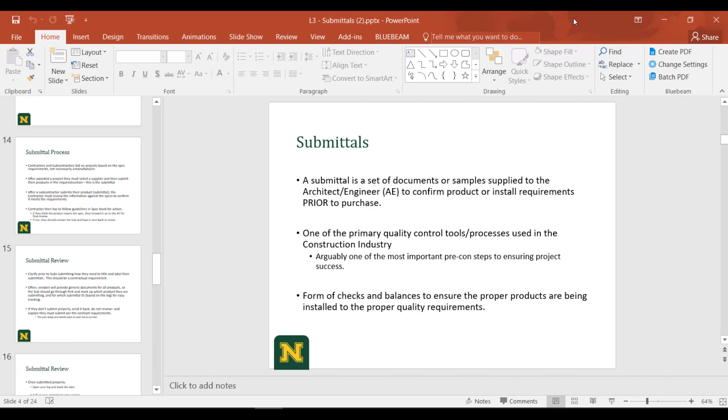Because what we're going to be doing here for this assignment, I'm going to give you 6 different submittals that you're going to have to review, and you have to track them against a log that I've given you. So again, if you have any questions on this, please let me know, because submittals sometimes can be really tricky to understand, but other times if you've done them and you understand the purpose and concept, they might go kind of quick. Just another resource here for you to understand the importance of submittals and how to do submittals.

But what we're going to get into is assignment A2, and here are all your assignment project documents. Like I mentioned, you have 6 different submittals to go through. So we have storm drainage piping, drinking fountains, hydronic piping, cabinet unit heaters, conductors and cables, and then wiring devices. So a couple plumbing, a couple mechanical, and a couple electrical for you to go through. You also have the submittal log and the assignment instructions, and then a guide for how to fill in the submittal form. So the A2 assignment looks like this. I'll just walk it through really quickly so I can give you an example.

Just again, a lot of what we do in this program is guided by our advisory committee, which is made up of 25 people from around the country, and they want to see more submittal review. And it's a good practice because it's how we actually really learn. At least for me, this is how I learned a lot about MEP systems in general, is just managing the submittal process.

So early on, I was pretty fortunate. I got to work on one of the world's biggest children's hospitals, and I was in the MEP division, and I had to manage the entire submittal process and the Navisworks process too. So it was kind of like getting to see full circle how important all the products are, how the submittal process works, the importance of the submittal process, and just understanding how to track all the products that are coming in. So let's see.

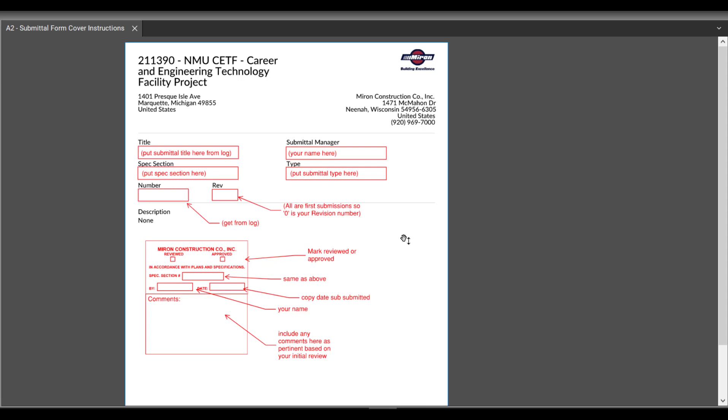So again, I just want to mention that this is a real project with a real contractor, the building that our program is housed in. So none of this stuff is to be shared anywhere. It's just for educational purposes only. And I do have my own markups, so they're not the actual final documents. They're just, again, educational purposes.

So what you're going to get for all of your submittals to review is this submittal form that you're going to have to fill in. So you're going to fill in the title, you're going to fill in your name here, what spec section we're dealing with, what type of submittal we're dealing with, right? So this is going to be like product data, shop drawing, stuff like that. What submittal number we have, so this is going to come from the log, and then what revision we have.

So if it's the very first submittal from that type, it's always 0 is the revision number because we haven't had any revisions. The other thing you're going to have to do is, because the way this spec is written, your job as the contractor is only to review or approve. Quite honestly, you're pretty much just going to review them. You're not going to approve anything because it's out of your wheelhouse. You're not the engineer of record.

You're going to put the same spec section as above because this is our submittal stamp. That's going to be you again here and who is signing this, and then what date. So what you're going to do here is copy the date that was submitted. And then down here, any comments that you might make. A lot of times, especially for like MEPs or structural drawings are another example too, where you're dealing with shops, you're mostly just reviewing them and sending them along.

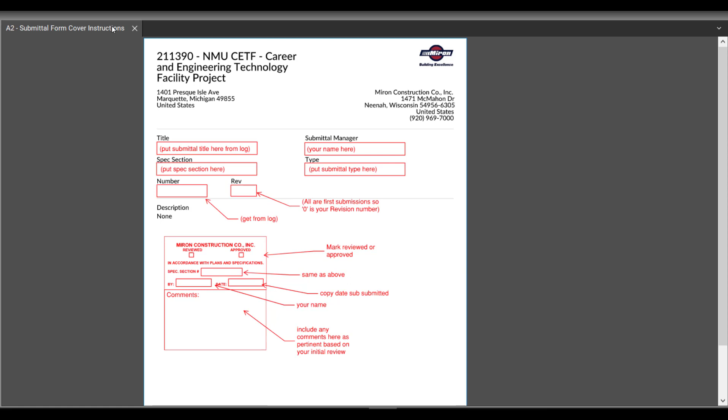And any comments or any things that you see that may not exactly meet the spec requirements, I'd highly recommend just putting a note that says like AE to confirm. So using the cloud function on Bluebeam, if you have Bluebeam to use, or something similar with a note that can just say AE to confirm, along with whatever other note and why it's not specifically meeting the specs as you have found. So that's just a quick little cover sheet to sort of help you along, a little guide so you understand what to do on that first sheet.

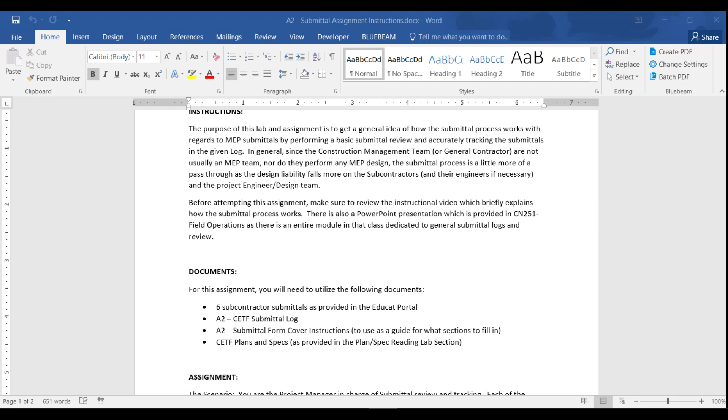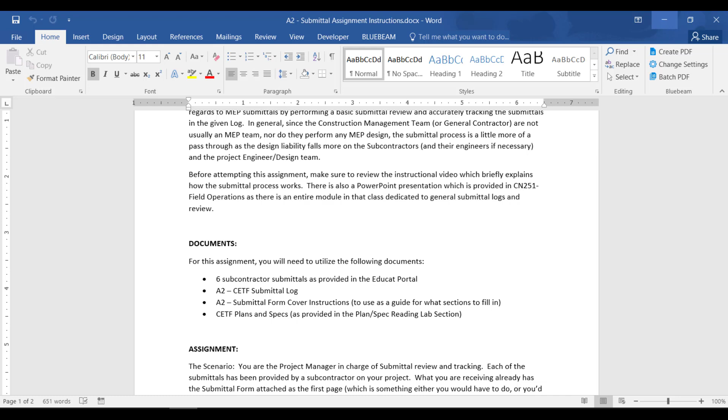The other thing you have to pull up is the CETF plans and specs, because you're going to have to look through specification sections for sure whenever you're dealing with mechanical submittals. And then you're also, in a lot of situations, going to have to pull up schedules. So if it's like a mechanical, like a cabinet unit heater, for example, you'll probably have to look at what the requirements are in the mechanical schedules. So make sure to pull those up and use those as well.

So here's the scenario. You are the project manager in charge of submittal review and tracking. Each of the submittals has been provided by a subcontractor on your project. What you are receiving already has a submittal form attached to it, right? So in general, a subcontractor would be submitting to you. Your submittal form would not be on it, but what I'm giving you is that submittal form that I just walked you through. So you already have the submittal form attached, which is the first page.

And step 1 is, when you take a look at that submittal, you're first going to have to track it in with the submittal log. So you're going to use the submittal log that I provided as well. It looks something like this. Okay, I've only given you the sections that are 20 through 28, just to keep it with the MEPs. So your job is going to be to fill out the section for just the 6 that I've provided for you for the submittals.

Okay, so you're using the log provided to plug in the submittals you received in the right categories. You must fill in only the information for these categories. So there's description, revision, responsible contractor, which is the subcontracting company that sent you the submittal, who it's received from, so it's whatever the person's name is, the date that is submitted, which is, we're using the date that's provided in the submittal form, and then the date submitted to the design team.

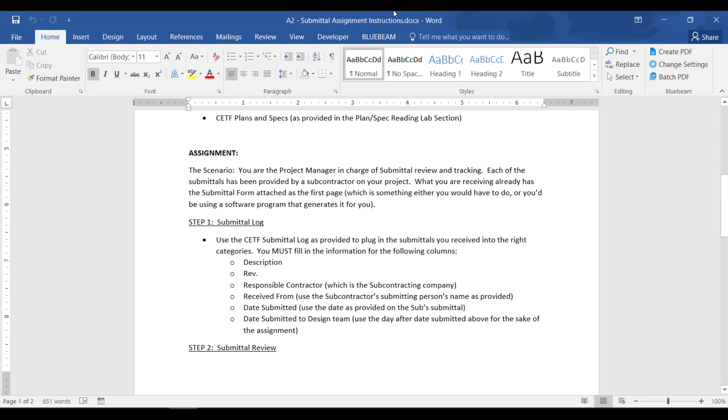So for this one, we're going to use the day after it was submitted to you. So in general, this will be the day that you get the submittal from a subcontractor. You're going to review it. Maybe it's the same day, maybe it's the next day, maybe it's a week. You generally have whatever your specs say, but maybe it's up to a week or so for you to review submittals before you send them on to the design team. So those ones again would be way over to the right here.

So I already have this stuff in for you. I have the title and I have the type, because I want you to make sure that at the beginning of a project, you would be submitting all this stuff and approving all this stuff to the architect, working through it to make sure these are all the products that they want. But what we would have to do then, once we get the submittals, we have to go through the description. I'll show you where that is in the specs.

What revision, responsible contractor, received from, right? The date received, the due date, don't have to worry about. That's just generally something that we would have to put in there. But then the date submitted to the design team, which for you guys is going to be the date after. I already have different dates and stuff plugged in based on the specs, so you don't have to worry about that either. So just follow the instructions on that one.

Okay, so the second step then, after you've gone through the submittal log with all 6 of those items, you want to take a look through the submittal review. So definitely need to use specs and plans for this, primarily the specs, but plans as necessary. You may have notes to take on there, but you may have nothing as well because there might not be any markups. You might be able to see it right away and be like, that generally looks like the right product. And you would pass it along because, again, you're not the engineer.

So don't look at this as being this really long thing. I would just want you to make sure you understand where to look for information and try to come up with some notes to clarify to make sure we have the right products in place. Okay, talked about the submittal cover form instructions. For any markups that you do, make sure you mark them up in red. So on your submittal form, when you get that, make sure that all your writing is in red. If you're marking up things throughout the submittal, make sure those are in red, right?

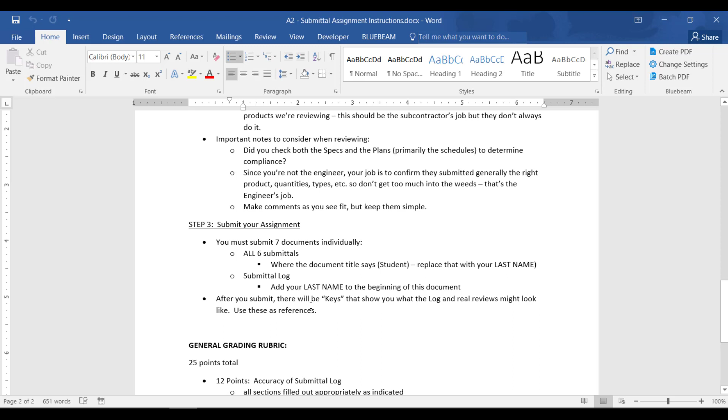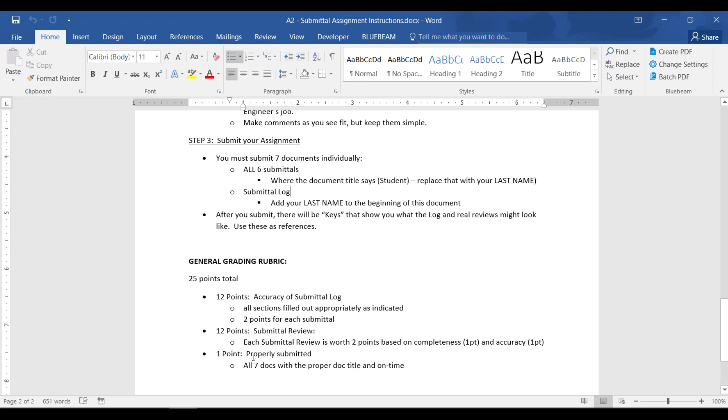So since there's 6 to do, the submittal log will have 2 points per each submittal that are on there. So generally your accuracy of the submittal log within there. And then submittal review, again, 2 points for each, and then 1 point for properly submitting. I'm just going to pull up one really quick so you can see what we're looking at here.

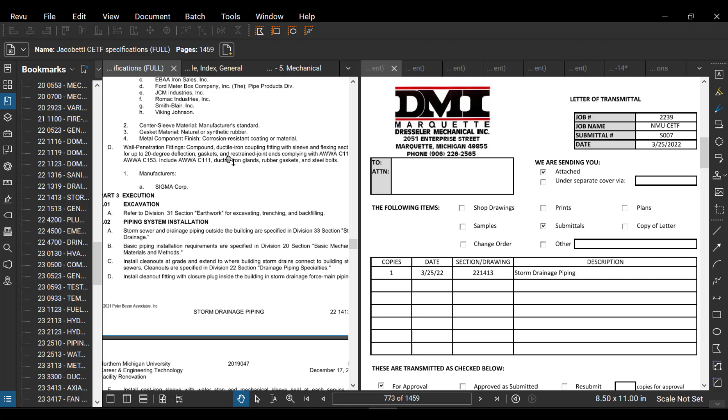So the very first one that's listed in EduCat for you is storm drainage piping. So I'll do most of this one together here just so you can see what we're looking at. I think this is the right one. Let's see here. Storm drainage piping. Okay, so I'm going to go into my spec sections, into the storm drainage piping, go right to the beginning so we can see it.

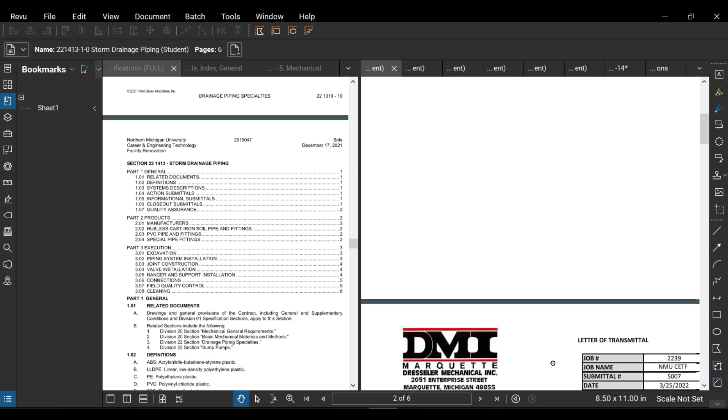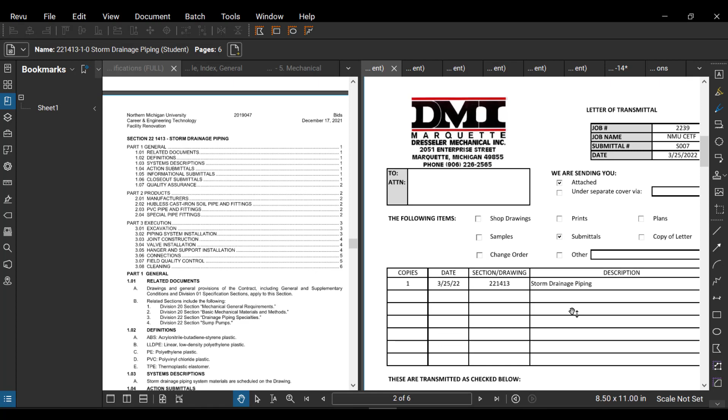So step 1 right off the bat here, this is what the subcontractor would be submitting you, and this is what you would have to fill in, right? So the title of this one would be storm drainage piping, your name, whatever spec section. So this spec section is listed up here, 221413, right? The type of submittal we're looking at is going to be product data, because what is necessary is product data for our action submittals.

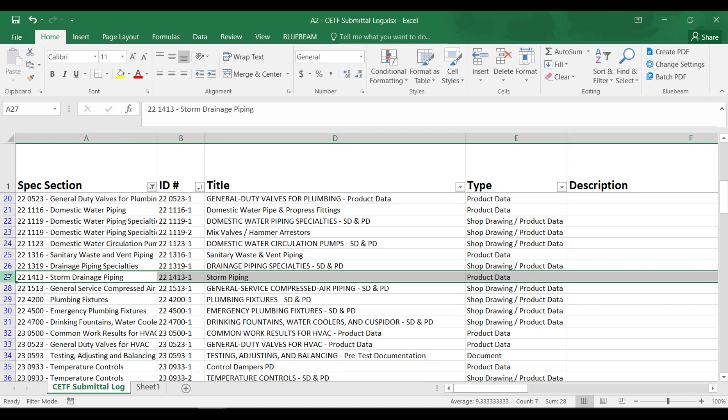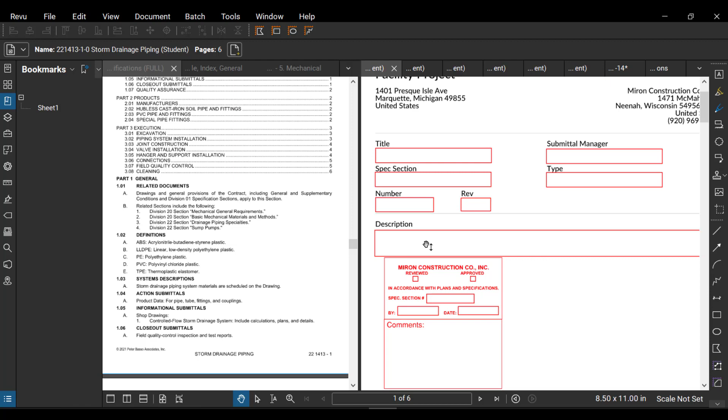Okay, the number, we have to look at our submittal log. So going back down to 221413, right? So here's the submittal number, 221413-1, because there's only one submittal in that spec section. So this is the category that we're going to have to be filling in. Okay. And then revision will be 0, and then product description. So the product description, where we get this is out of our action submittals section. So for this one, we're talking product data for pipe, tube, fittings, and couplings.

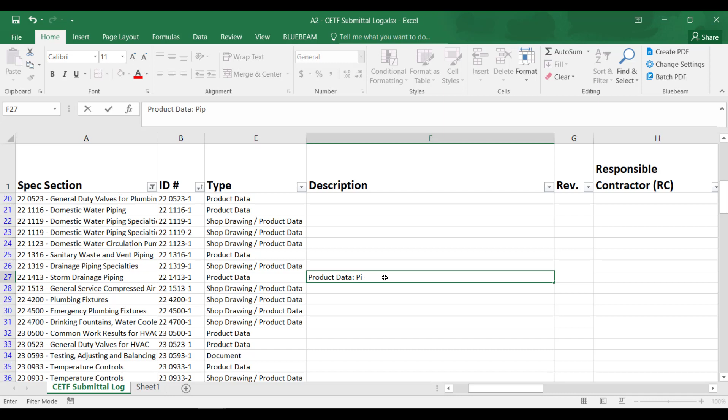Okay, so that description is the same description that we would put in this spot right here. So it'd say product data for pipe, tube, what else did it say here? Fittings and couplings. So that's also the same description we put in this spot. Then fill in the spec sections and all that stuff. After you're done, you can finish up this stamp here.

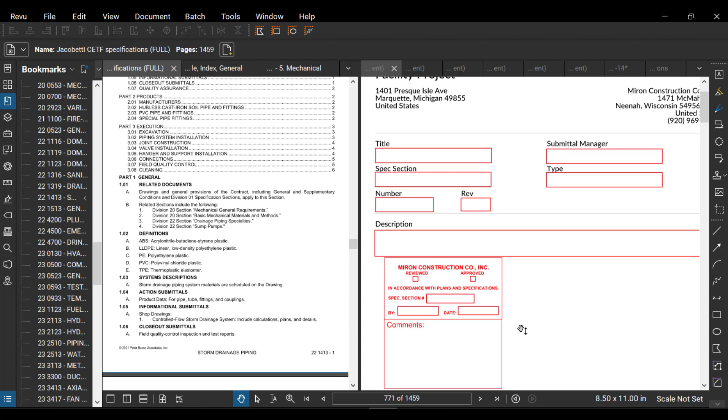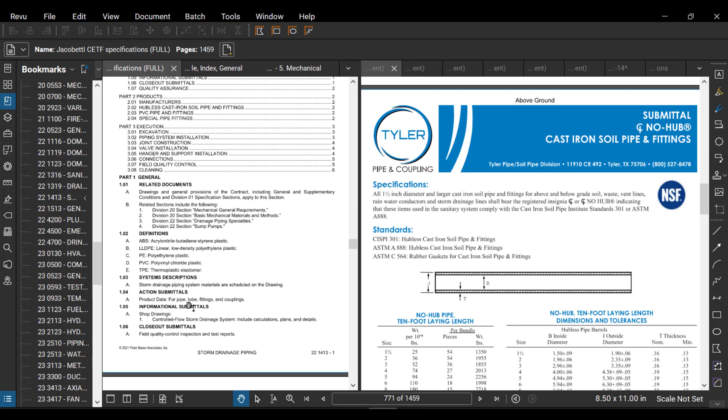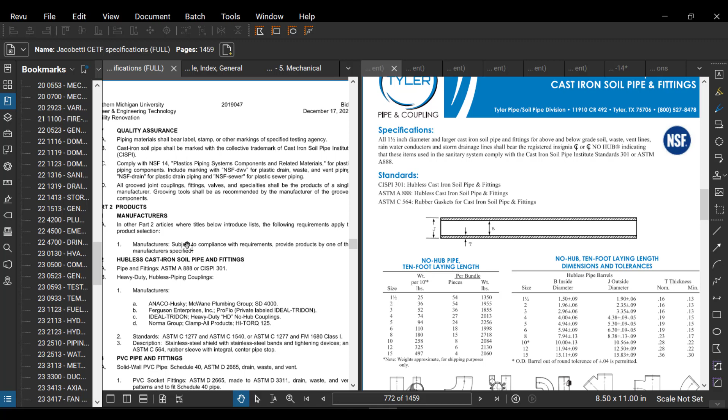Okay, so what we want to do next is take a look through what the actual products are that we're submitting on. So what we have here are no hub, cast iron, soil pipe, and fittings. Manufacturer is Tyler. Okay, so now that we know we have product data coming for pipe, tube, fittings, and couplings, that's what we're looking at. Okay, the next step we would look at is in our products, what our manufacturers are. So in other Part 2 articles where titles below introduce lists, the following requirements apply to product selection. This part's not terribly pertinent to us, but this one is hubless. We're talking no hub, cast iron pipe and fittings, hubless cast iron soil pipe and fittings. This is the section that we're looking at.

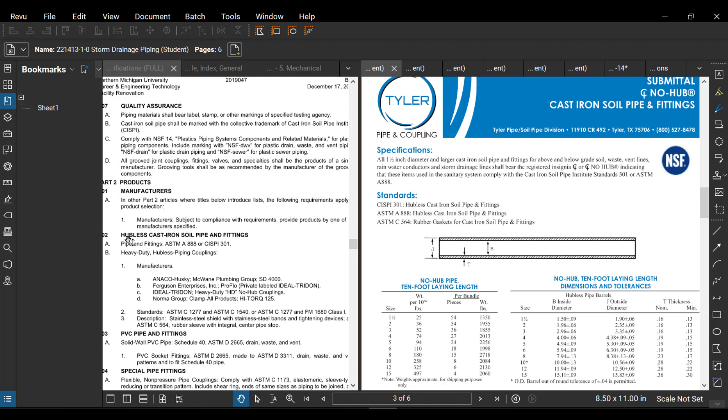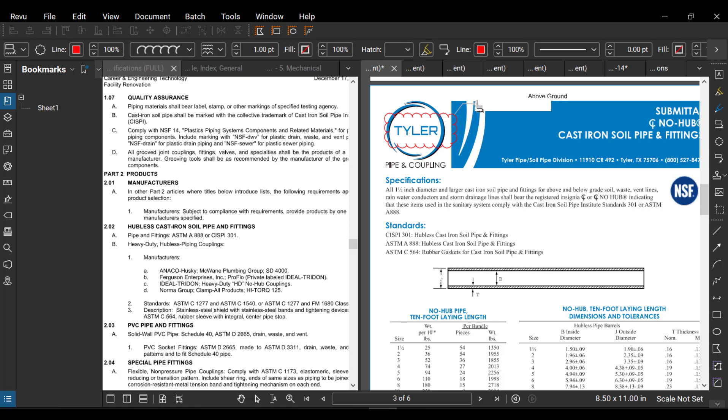So manufacturers right off the bat, we have ANACO-Husky, Ferguson Enterprises, IDEAL-TRIDON, and Norma Group. So we have Tyler right off the bat. I would probably just make a quick little note on this and say, like, manufacturer not listed in specs, AE to confirm, right? Just something simple like that, because again, that's just showing that we've reviewed it against everything. Now, the likelihood of them denying it is probably very low, especially if we meet all the generic standards.

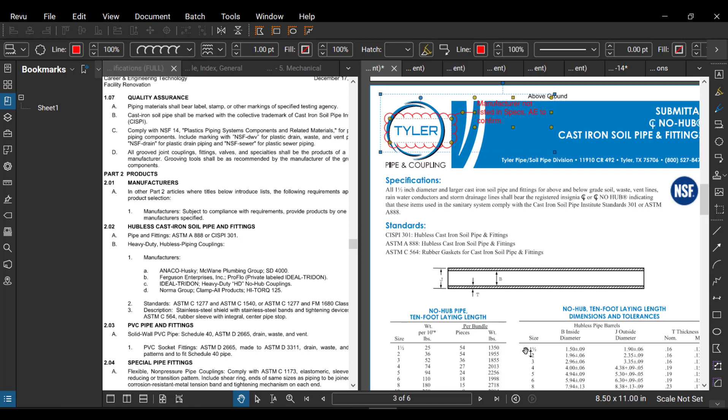So the very first thing we would probably look at is what these testing standards are. So CISPI 301 for all hubless cast iron pipe and fittings. So where we would find that as we're going through, we're not looking at PVC. Oh, I jumped ahead here. Hubless cast iron pipe. So pipe and fittings, ASTM A888 or CISPI 301. So we have 301 and A888. So I would come through and I would just, I like this little counter function. We knock both those off the list. It meets both of those.

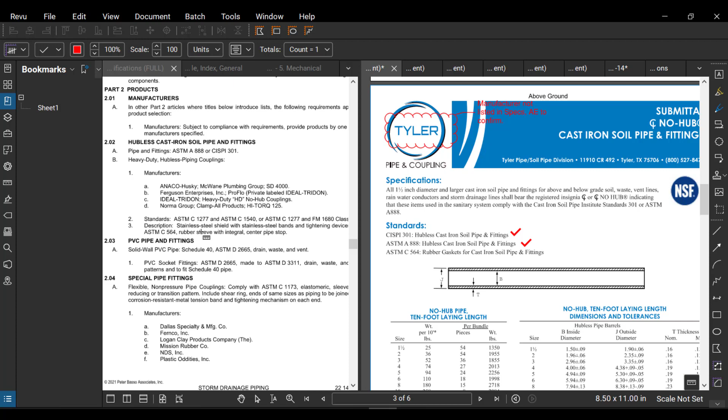And then we're talking gasket standards right here. So rubber gaskets for cast iron soil pipe and fittings. Where we'd find that is down in this section right here. We have description, stainless steel shield and stainless steel bands, tightening devices. Here's ASTM C564 for rubber sleeve with integral center pipe stop. So that's what we're talking about here, that ASTM standard. If you come down a little bit further under special pipe fittings and sleeve materials, you'll see that again where we have for cast iron soil pipes ASTM C564 for rubber. So these are the products.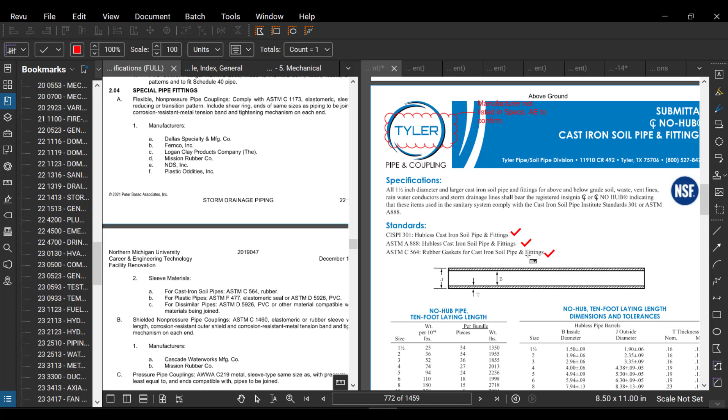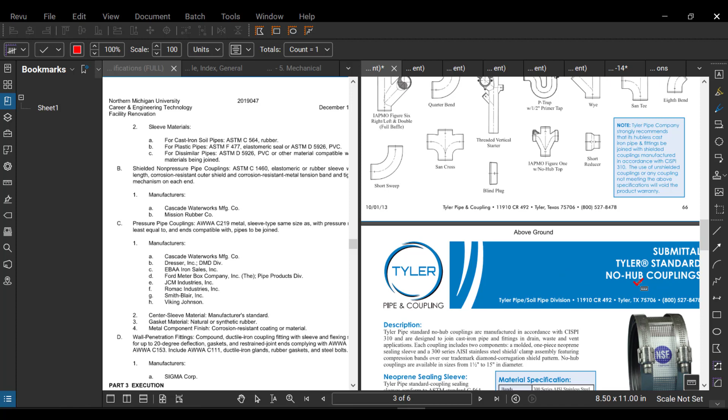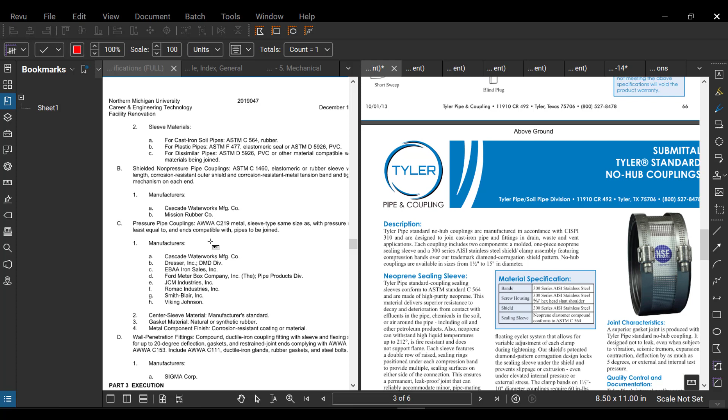So after that, quite honestly, I'd be pretty much done. I just look through, make sure that everything is submitted upon that we're hoping for and that we needed per the log, right? So right now we also have no hub couplings that are part of the same submittal. So I'd take a look through this again just to make sure that we meet. So reading through the description, it meets the same general standards. The neoprene sleeve sealing, we can look over here on the left where we have couplings. Let's see, non-pressure pipe couplings.

What standards those guys would go with because our no hubs are non-pressurized. So we're not even looking at pressurized couplings or anything like that for this one.

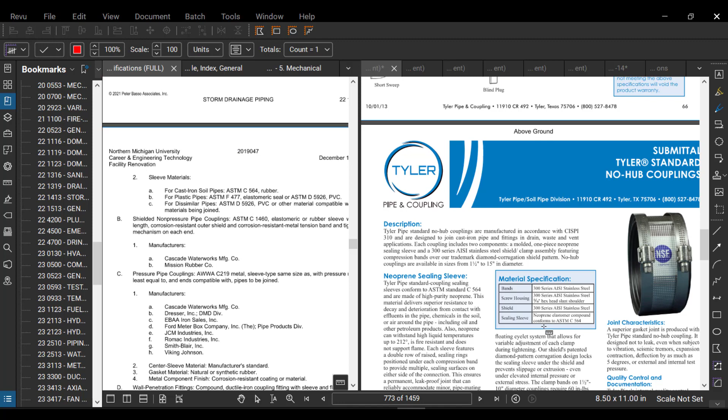So taking a look through again, we have hangers and supports. They also submit on this, which is all part of the same submittal for this one. Let me exit out of my counter if I can.

So where we have hangers and supports, these are generally in our execution section because this is how we actually go and install them. So they're not necessarily products that are housing the system, it's the stuff that supports them, so it's part of installation processes.

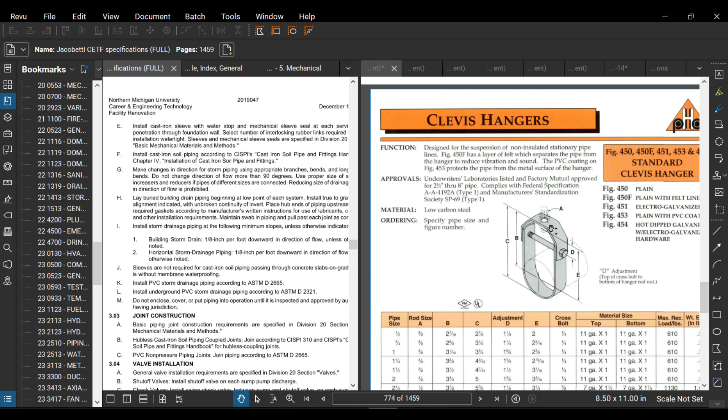So if you look through this section, we're not talking joint construction, even though this would be a good place to actually look back and confirm that however they have joints listed for hubless is accurate.

Remember, we had CISPI 310. So we're meeting these general testing standards for it, and that's how we're installing. But hanger and support installation...

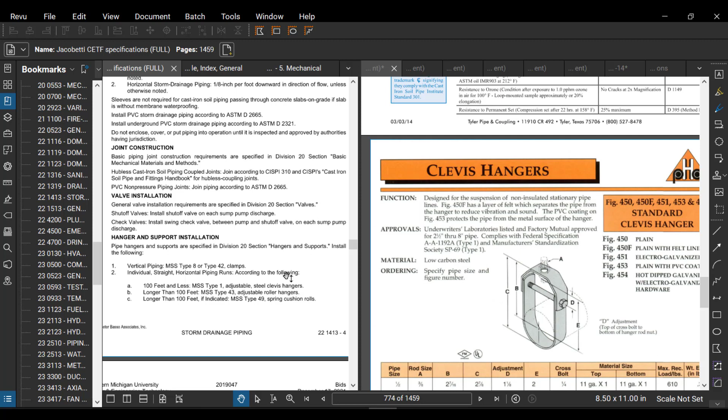So for this one, we have vertical pipe MSS type 8. Let's see, install following individual straight horizontal piping runs according to the following. So this is kind of what we're looking at with these ones. You just kind of read through and see what standards we're dealing with here.

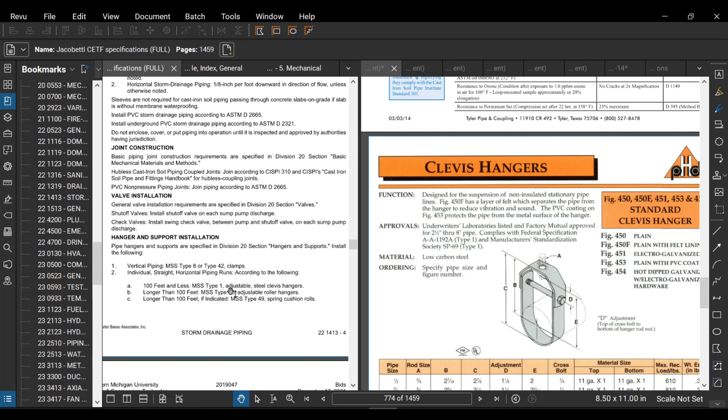So for our approvals, kind of walk through, we have comply with federal specifications and then Manufacturers Standardization Society, so MSS type 1. These are our installation standards for anything that's 100 feet or less. So then at that point, it's up to the subcontractors as they're installing to confirm with these regulations, and that's what they're submitting on for this install.

So this process then takes you into when the subs are also going to actually install the products, confirming with your checks and balances that they're doing it per the standards and requirements set forth in both the specs and whatever the testing standards organization is.

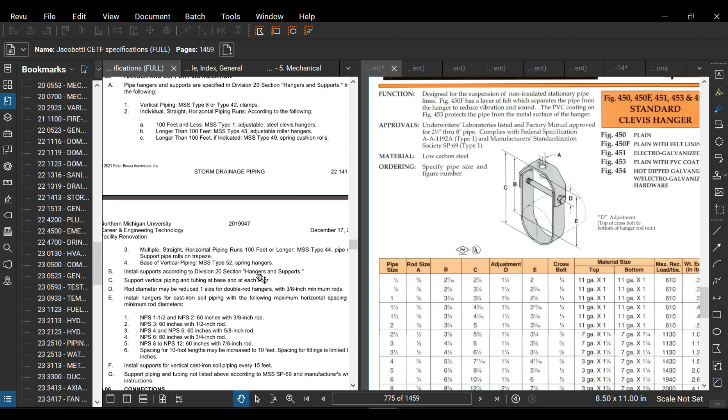So relatively, again, a little bit straightforward. It took maybe 5 minutes to walk through that. I anticipate if you've never done it before, it'll take probably a little bit longer to walk through it.

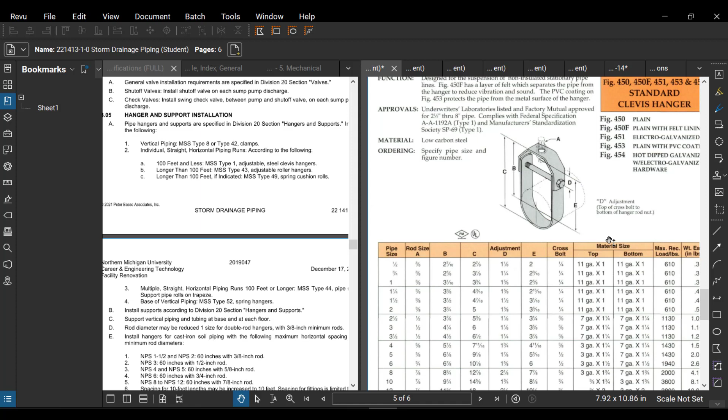If you look through all this stuff, you can find information on all the different sizes and then all the material sizes for all those different things, the different load ratings, all that stuff. But again, that's more for the engineers to confirm. You're just confirming that they give us the right product.

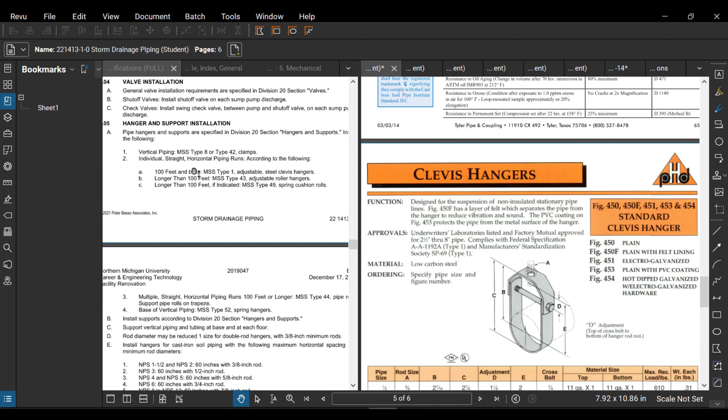These ones say Clevis hangers. We have Clevis hangers. We have the right standard testing procedures that are required in the spec. So for this one, I would say we're pretty good.

I'd go through here and as I was finalizing this, I would just say reviewed comments, see comments as noted throughout submittal or something similar to that. And that's pretty much it.

Pretty easy, pretty straightforward. Just a really important process, and it also helps you learn how the plans and specs are put together. It helps you learn a lot more about what products are actually in your project.

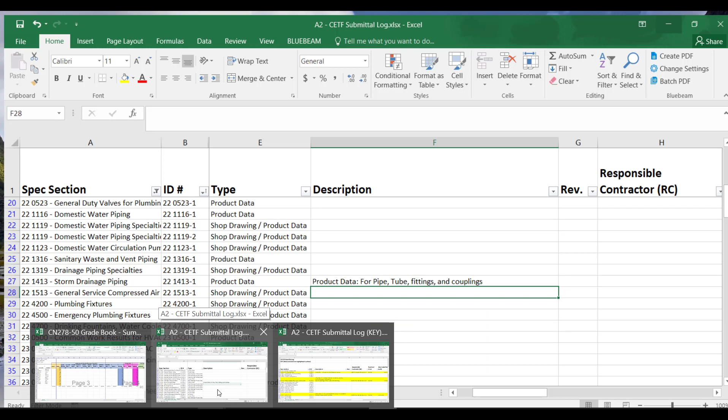And as you're coming through here to finish up your submittal log, the responsible contractor on this one was DMI. It was obviously revision 0, like all of them.

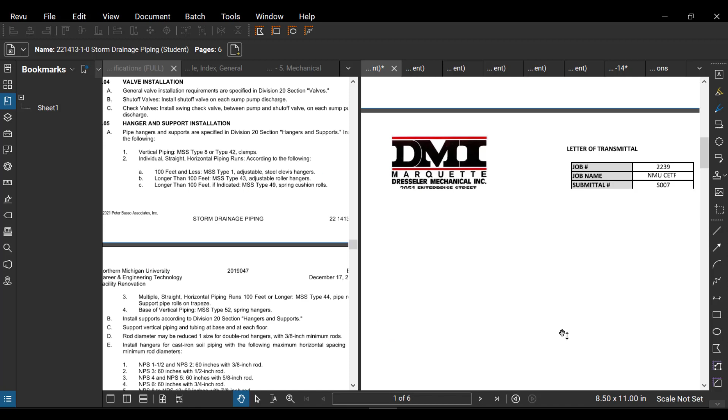Received from, what name did I put on here? Authorized signature was John Doe. Okay, date submitted. We have to look back through here and say the date was 3/25/22.

Okay, we can skip the due date. The date submitted to the design team would be the next day, so 3/26/22. And then the rest should populate automatically based on what the specs required.

So when you're finishing up this sheet, you could put the next date so that 3/26/22 would go there. And you'll have to do that for the other ones too. So there's 6 of them to do.

Again, just make sure you find the pertinent information, the most pertinent stuff. If there's any questions on it, please let me know. They can be confusing a little bit to figure out where the right information is to look at, especially once you start getting into...

Schedules. So this one's obviously just pipe material, so we don't have to worry about schedules so much, but later on when you get into, I think this one might be the fans, that's hydronic piping. One of them's a fan somewhere in here. Like that one, I would highly recommend taking a look at the schedule as well to confirm.

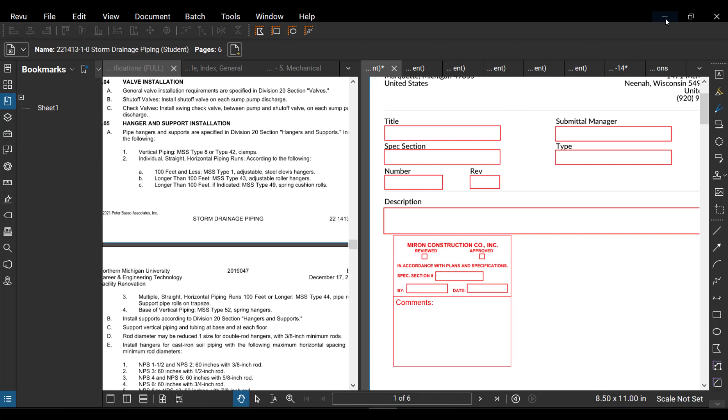But after that, make sure you submit your 7 documents, right? So all 6 of these marked up, and then your submittal log that's filled in with the 6 submittals, and turn them in according to the instructions. And if you have any questions, please let me know.